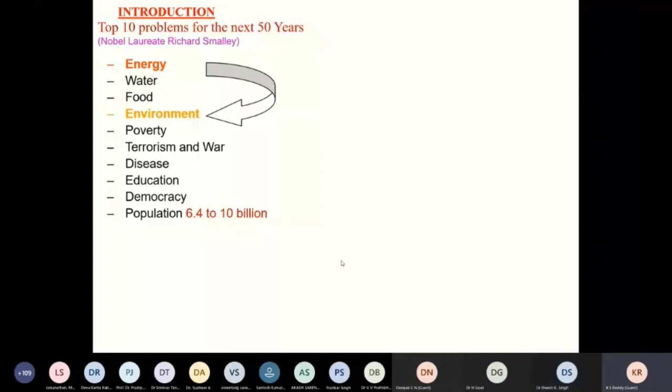So now, if you look at the future, the first three important things are energy, water, and food. Clean energy is an important aspect. Food is a major concern because population is growing rapidly, exponential growth in population. So the required food needs to be produced in the most effective way, and the agriculture sector needs to be strengthened.

Apart from that, water is another important thing. Most of the water bodies in India are polluted, and even across the world. So potable water is important now. If at all there is unrest across the world, it could be for these three: food, water, and clean energy. But for human survival, there's another important requirement, the air.

Somehow we are getting air free of cost. We are not spending any money, whereas we need to spend a lot on clean energy, food, and water. Though air is free of cost, it's not clean air. Because of energy consumption, human activities, industrial development, and increase in population, the environment is not conducive for survival. So there's a lot of potential to develop technology which makes the environment sustainable, cleaner, or green. Therefore, energy can solve some of the problems.

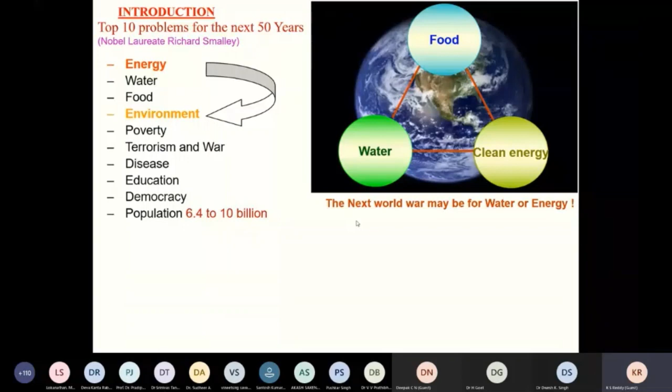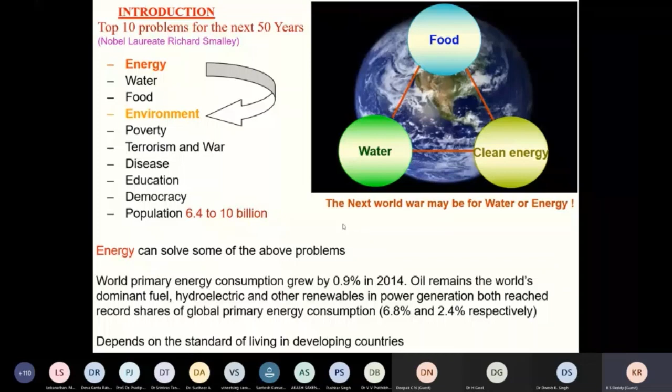Energy consumption is also rapidly growing day by day because of mainly three reasons: improvement in standard of living of people, massive industrialization, and population growing rapidly. These three reasons are mainly responsible for the increase in energy consumption.

And I have muted, sir. I have muted, you can continue. Okay.

Income energy includes solar and lunar energies, mainly non-depletable: electromagnetic, gravitational, particle energy from stars, planets, and the moon, and the potential energy of meteorites entering Earth's atmosphere, referred to as celestial energy, the energy that comes from outer space.

Capital energy is the energy that already exists on or in the Earth, generally in chemical and nuclear form, plus geothermal energy. So geothermal and atomic energy are referred to as capital energy.

If you look at reserves from the source, there are 4 reserves. The energy reserves on Earth can be grouped into 4 categories. First is renewable, which includes solar, wind, biomass, and ocean. The other is fossil fuels: coal, oil, gas, and nuclear, whether fission-based or fusion-based, depending on conditions. Generally, coal and fossil fuels are responsible for pollution, whereas nuclear and renewables are cleaner fuel sources.

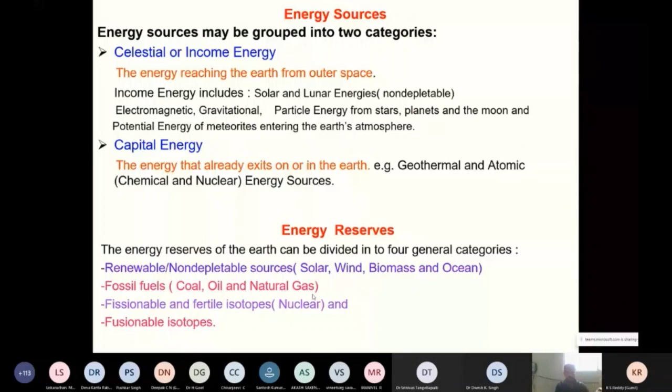If you look at the energy conversion system, which we call energy system hierarchy, it is transformed into equipment services. Energy sources include both fossil fuels, oil, gas, coal, and renewables, biomass, solar, wind, and nuclear. These are transformed into energy carriers, or secondary form of energy, subsequently used for various applications. These secondary forms of fuel or energy carriers include the most efficient form of energy, electricity, and liquid fuels.

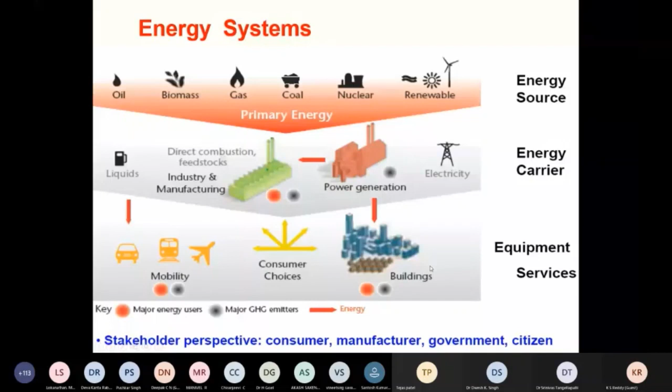If you look at the technological challenges, no single technology or policy can do it for all. There are different problems: region-based, source-based, market-based, preference-based, scale-up-based, technology-based, and time and infrastructure-based challenges. There are several challenges, whether for vehicle energy efficiency, biofuels or hydrogen fuel as part of mobility, or zero net emission buildings, since the building sector is also an important role as far as energy is concerned.

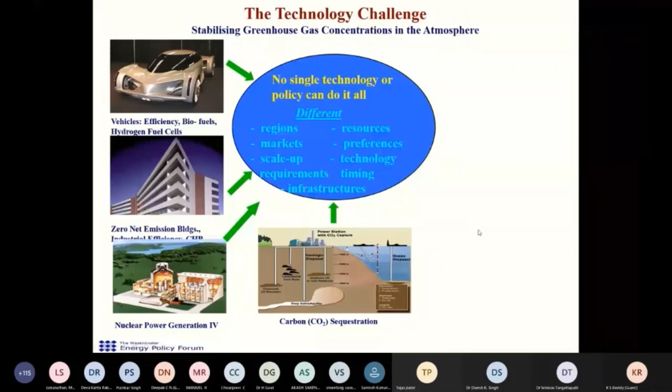Whether we go for industrial efficiency or CHP or any other thing, nuclear is another important aspect where 4th generation, 5th generation nuclear reactors are being developed. Pollution is a major problem, CO2 capture is a major issue, and CO2 sequestration is an important aspect. Advanced grids are important because transport, distribution and transmission is a major aspect for high quality energy like electricity, so advanced grids play a major role. Biofuels and power generation is another important aspect.

And of course, finally, the renewable energy technologies. So these are several challenges, and especially we are discussing the most important aspect, renewable energy technology, mainly solar thermal technologies.

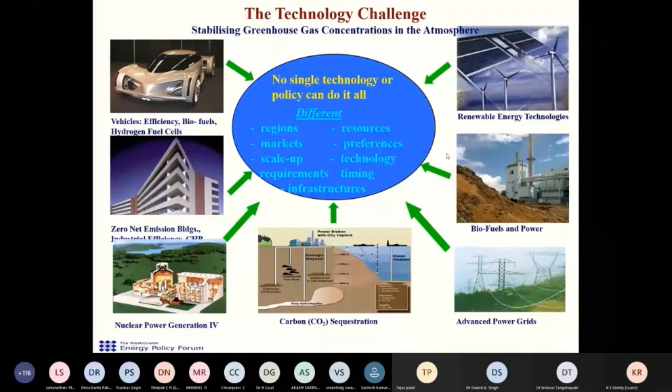It has a good potential and plenty of potential on the earth. If you look at the solar potential, it is about 23,000 terawatts, but the present world's energy consumption is only 16 terawatts. You can see how many times over we have solar energy potential.

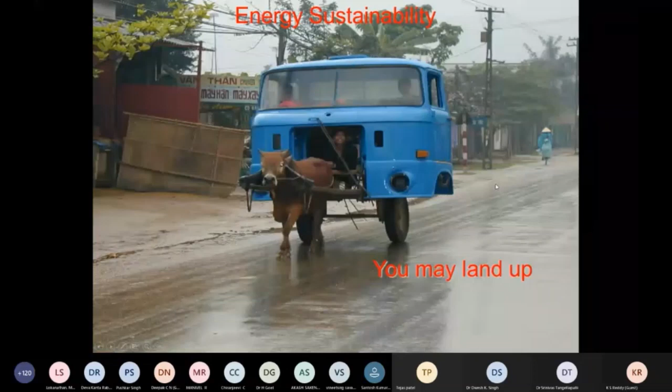Energy sustainability means - if you look at the Earth, it is bluish in color, but it's also surrounded by the atmosphere. As I mentioned, indiscriminate use of fossil fuel may result in imbalance of the atmosphere around it, because about 15 kilometers above the Earth is atmosphere, and that atmosphere is getting polluted. Because of fossil fuel utilization, it is literally being burnt and imbalanced.

Any imbalanced system is because the atmosphere is overloaded with pollutants, which results in imbalance. Any overloaded system looks like this. If you put too much pollutants into the atmosphere, you know that we are facing a lot of problems.

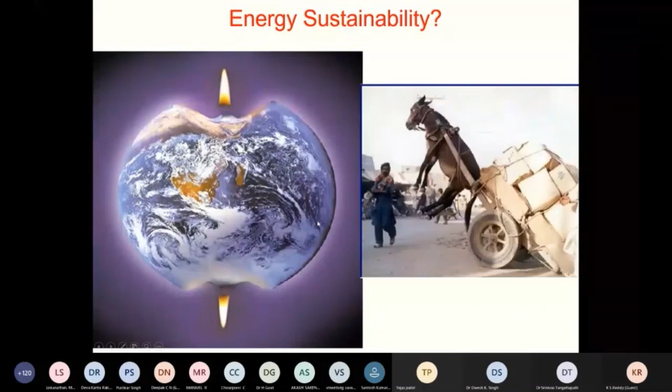So overloading the atmosphere with pollutants may be same as any overloaded system which you have seen on the right side. Therefore, energy sustainability is important because the resources need to be used most effectively.

Here you see these natural resources, including energy resources, and if you try to consume them like this without technology, they will become extinct after some time. Then this part will become empty, and future generations will not have any energy sources. So we have to keep the required resources for their use.

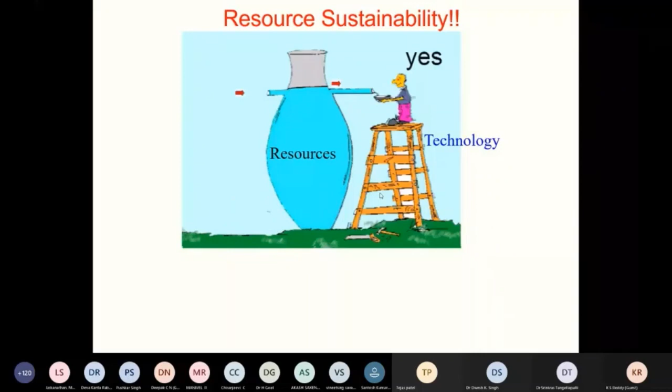It's important to develop an indigenous technology to keep resources for the future generation, and we can use our own share by developing this technology. That's why the future generation says there is only one Earth we have to take care of, please.

For energy resources, this technology is a renewable energy technology - not just a tool, but a renewable energy technology. You have to develop renewable energy technology in a more sustainable way to take our own share, keeping these reserves and resources for the future generation, while we take our own share.

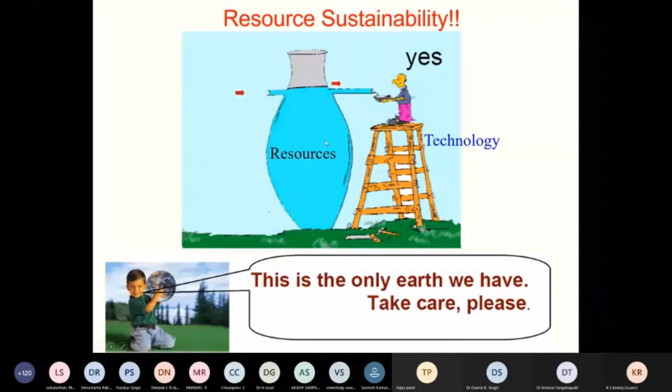If you look at energy reserves, which I have already mentioned earlier, the present annual energy consumption includes fossil fuels - coal, oil and gas with these big blocks - and uranium. With the present energy consumption rate, these reserves are finite.

They may become extinct after these many years respectively: natural gas in 63 years, oil in 46 years, and coal in 119 years.

Of course, uranium for nuclear is still unknown and not commercially used to a larger extent. But if you look at the top, there is abundant solar radiation available.

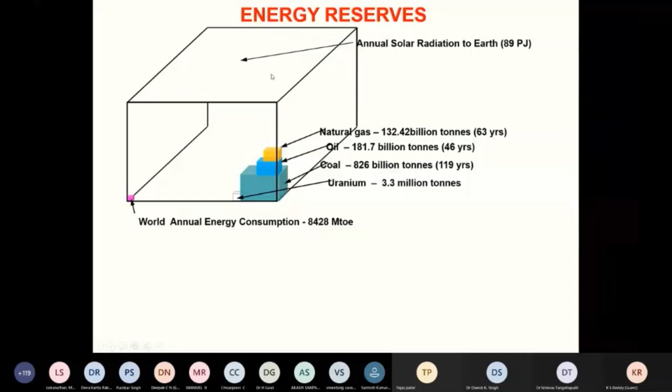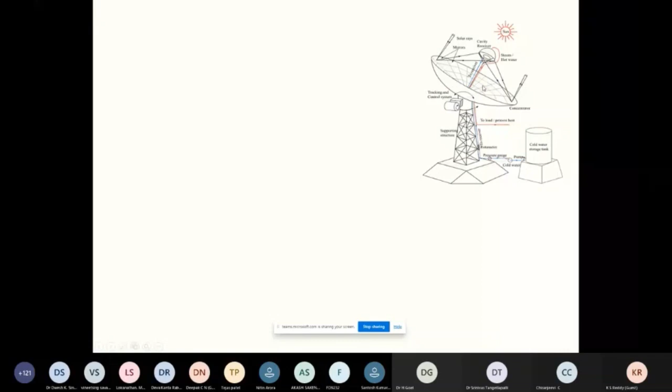There are three main components: concentrator, receiver, and support structure with tracking. This has to be tracked continuously. The development of a cavity receiver for high temperature and high pressure applications is a challenge, but there are a lot of opportunities in this.

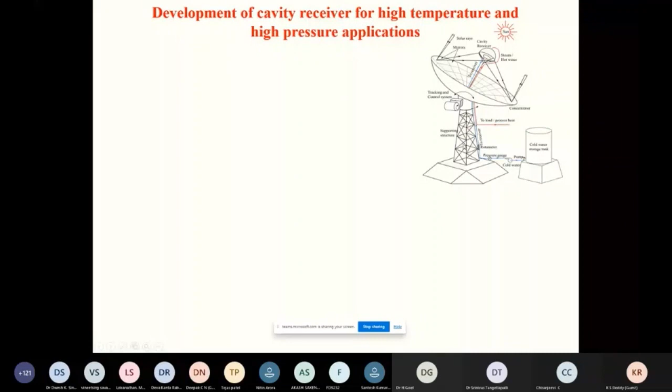All CSP technologies, like the parabolic collector technology, are most efficient with high concentration ratio and high operating temperatures. Here you see the tracking mechanism, the receiver and mirrors, and of course storage tanks are there.

The receiver plays a major role in solar thermal energy conversion and estimation of heat losses. The performance study is very important, and various researchers consider isothermal receivers, cavity receivers, adiabatic receivers, and so on.

But we have developed a technology which takes care of superheated temperatures up to 500 degrees Celsius and reasonably high pressures.

Applications for steam generation include superheating steam for multi-megawatt power plants, while saturated steam is for food industry, textile industries, and cooking applications. A subcooled system is for air conditioning and paper and pulp industries.

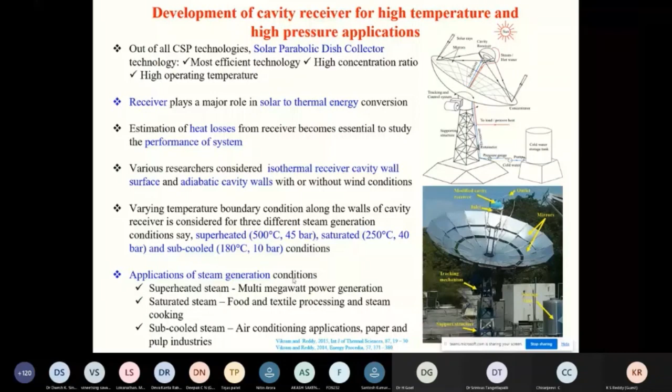But we have to discuss this receiver. Development of the receiver is very important, and this receiver has been studied under three different conditions, mainly from a heat loss point of view. These heat losses have been estimated with different techniques and so on.

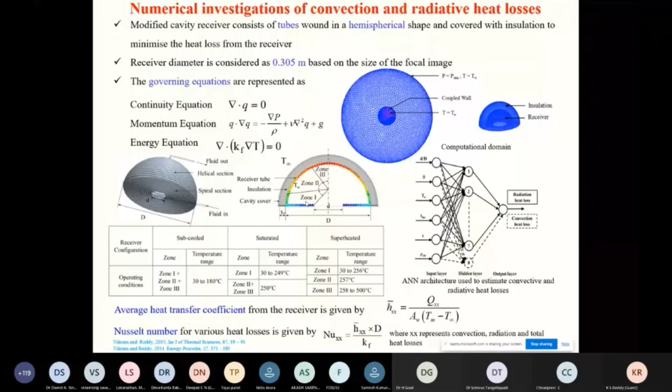We can even use artificial neural networks to find out the different receivers - mainly cavity, semi-cavity, and modified cavity - and how they are oriented in different directions, and how the heat losses occur from the cavity.

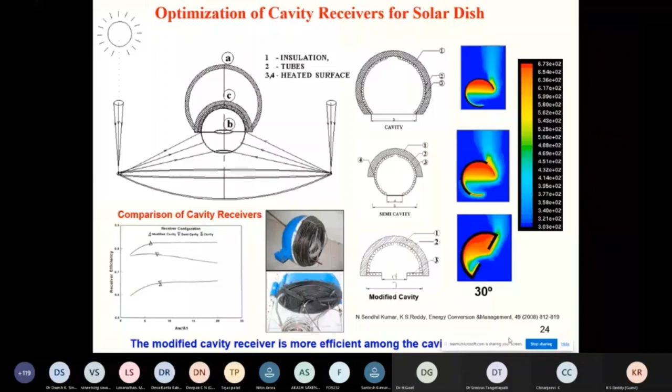This has been done with a numerical method by CFD analysis, and it was found that the modified cavity receiver appears to be more efficient in this case. So there are a lot of challenges, and design and development of the fuzzy focal dish is also very important.

We have different dish technologies: sharp dish and fuzzy dish. A sharp dish is very accurate, but if you go for inaccuracy, it gives a fuzzy focal dish, and because of the fuzzy focal nature, imperfect optics are involved.

That results in a wider range of focal image, which needs to be captured by the cavity receiver. Estimating heat losses for these cavity receivers is very important, and these losses depend on geometry, orientation, temperature, wind speed, and direction. So we developed a comprehensive model to estimate heat losses across different orientations, temperature ranges, and wind speeds, and this is the Nusselt number correlation for convection.

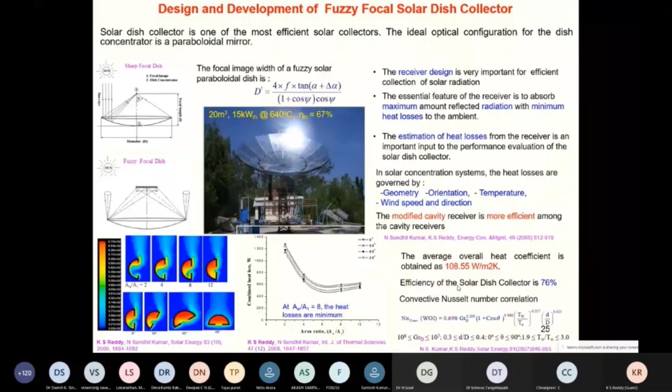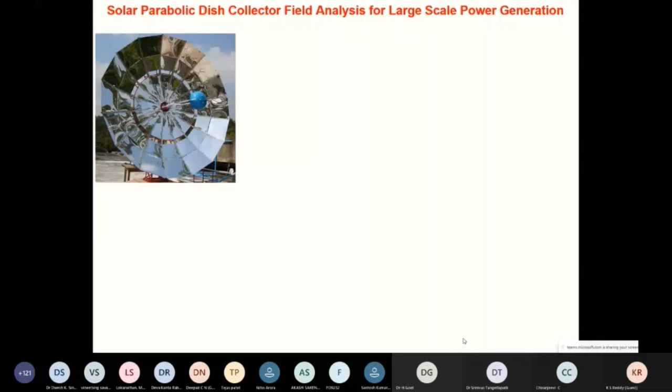If we have this parabolic dish, we have to analyze a problem - not only a single collector, but multiple collectors as a field.

As I mentioned, different correlations have been developed for different conditions, mainly covering both convection and radiation. These are extensive heat transfer analyses, and the total Nusselt number correlation for different temperatures, the D by D ratio, insulation thickness, and other parameters have been studied here.

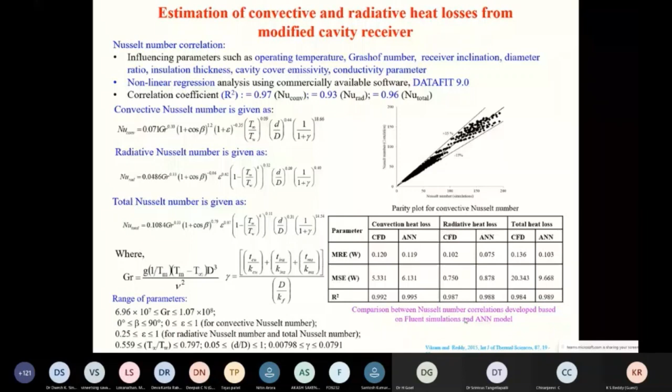We have also used artificial neural networks to come up with these heat transfer coefficients, and they seem to perform better compared to CFD analysis, because CFD requires a lot of space, code, and other resources. So we can use statistical methods to find out how effective this is.

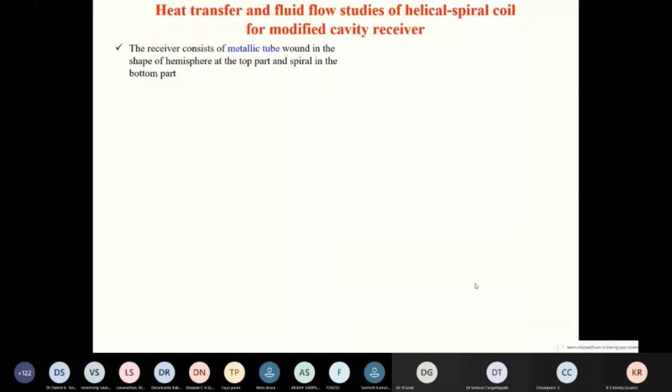Heat transfer and fluid flow studies: here is heat transfer, fluid flow, and the helical-spiral modified cavity. You can find out temperature and all these parameters.

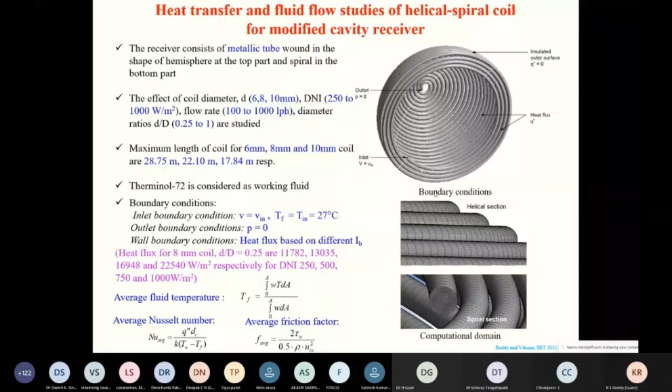There are a lot of challenges here - grid generation, boundary conditions, and so on. We have come up with the average Nusselt number for different sizes of this and different boundary conditions.

Looking at heat transfer and fluid flow studies in the helical coil for the modified receiver, there's an entry showing how the flow distribution in the tubes for different sections has been studied - this is liquid, liquid to heated fluid, superheated, and so on, depending on how it goes through and comes back out.

Here you see the cross section of the cavity receiver, and how the fluid transforms into different phases and so on, as shown here.

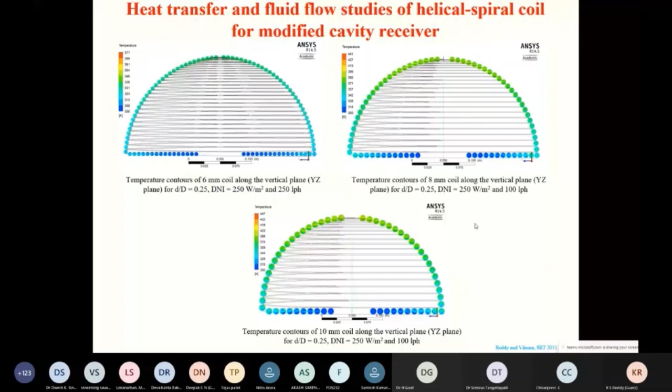There are several issues and challenges here - the receiver, absorbing coating, vacuum evacuation, glass to envelope, glass to metal seal, absorber stability, and all this. These are the major challenges in the development of parabolic trough.

There are receivers which can handle the two-phase condition, using thermic fluid or water, anything. We have done comprehensive heat transfer analysis for this, studying how we generate superheated steam and so on.

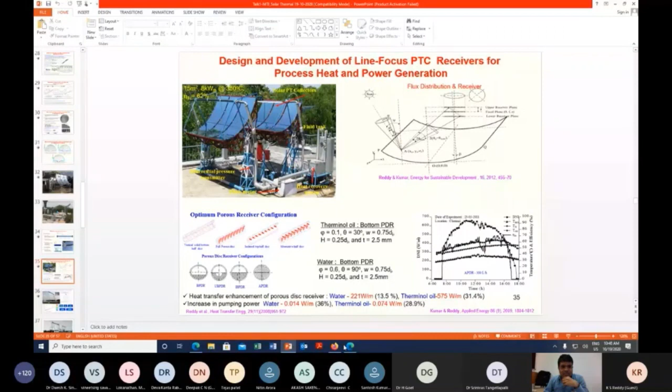Sir, how much cost will it be for implementing this parabolic shaped antenna? For implementation of such a parabolic shape antenna, how much cost will come in capex cost?

Capex cost depends on the size, but generally based on the surface area, it's about 10 to 15,000 rupees per square meter. Based on kilowatts, per kilowatt it will be somewhere about 1.5 to 2 lakhs rupees. Okay, thank you sir.

Professor Srinivas, may I ask you something sir? Please go ahead. Myself, Professor Goel, working as a chemistry professor at State Engineering College, Uttaranchal. As a man of chemistry, I am asking you, you are using parabolic reflectors. What chemical are you using as a fluid to transfer the energy? What fluid, chemical?

See, these fluids can be different fluids. They can be anything, but generally for heat transfer, the basic character of the fluid is it has to be cheaper.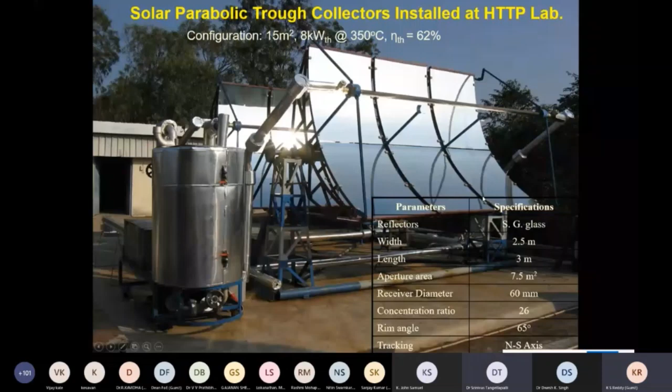This is a linear parabolic trough collector where it's made parabolic, but on the other side is a line. In the previous case it was three-dimensional; this is two-dimensional parabolic, and all the reflected rays come onto this receiver where it's heated up. Working fluid is sent on one side, and steam is obtained on the other side. Based on that, we have come up with different generations of parabolic dishes and troughs.

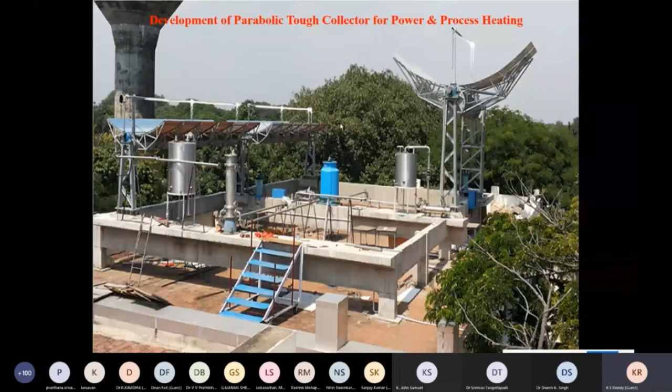This is a power plant installed in our lab for process heat and power generation. There are several challenges we discussed, mainly regarding the receiver, absorber, vacuum and evacuation, glass-to-metal seals, absorbability, and stability.

All these are major challenges, but some we have to fix. Therefore, there's a lot of potential for opportunities also in developing these.

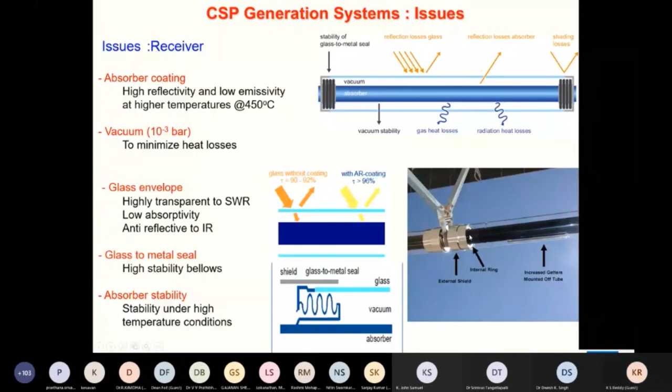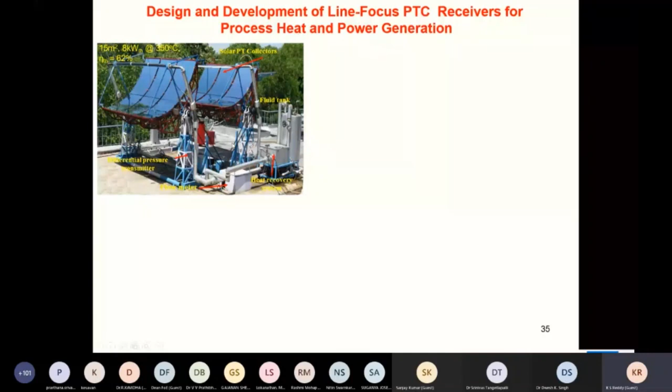One is the design and development of a line-focus PTC receiver for process heat and power generation applications. You can see two parabolic trough collectors connected in series, and we need to do optical analysis because, as I mentioned, there are three important components: the mirror parabolic concentrator, the receiver (whether line focus or cavity receiver), and the support structure, because a huge support structure is required, along with a tracking system since we have to track continuously.

Moreover, these systems are kept in outdoor environments, open conditions, so they have to withstand wind loads, extreme dust, and other conditions. This is a two-phase system, so the receiver is also very important, and optical analysis is crucial.

Based on this, we have come up with an optical analysis and found different heat transfer coefficients as well as heat transfer rates for different working fluids, and then we evaluate the performance under different conditions.

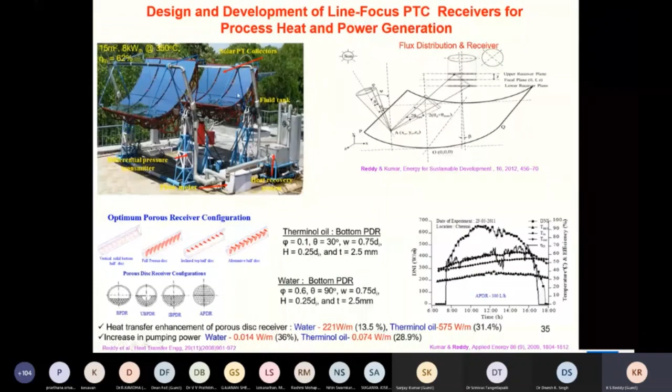Hello? Sir, continue. Yeah, okay sir.

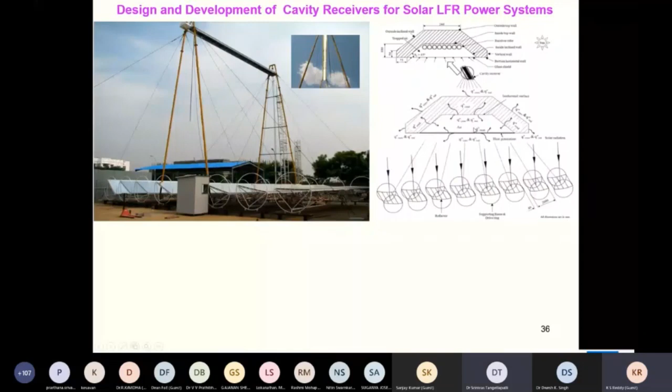This will have several heat losses involved, whether conduction, convection, and so on. That is the problem, and we can find out the heat losses in these receivers and determine the different aperture angles, aspect ratios, and so on.

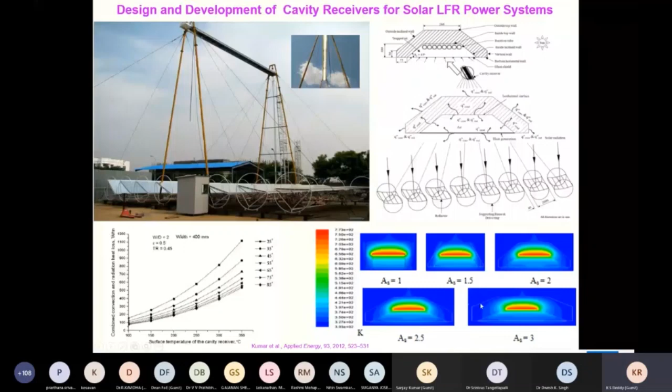This one can produce cogeneration, and I think Dr. Srinivas is going to cover the polygeneration aspect. So we have explored cogeneration and trigeneration aspects here. Cogeneration means both heat and power, and polygeneration means heat, power, water, and air conditioning.

In fact, we produce water and use it for process heat in the kitchen, as well as, since this is a school, for air conditioning aspects.

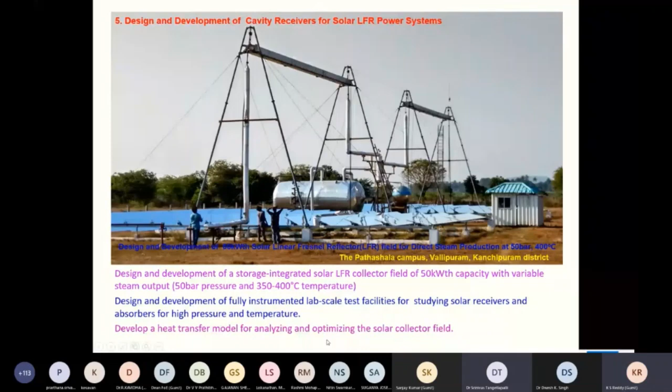You can see the receiver, how it looks, and how a lot of optical, thermodynamic, and heat transfer studies have been carried out; these are available in open literature. You can look at some of my papers if you are really interested in this.

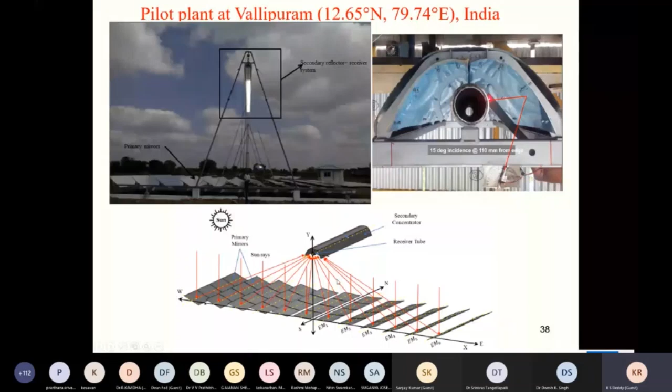Again, we have to do heat transfer analysis with computational three-dimensional heat transfer. This is the computational domain, and there are a lot of challenges here, such as how to get the flux distribution and so on.

So we have to consider it lengthwise, because the wind flows from one end to the other. There are different types of wind conditions, whether the wind comes onto the receiver or away from it, or from the side, bottom, top, or anywhere else.

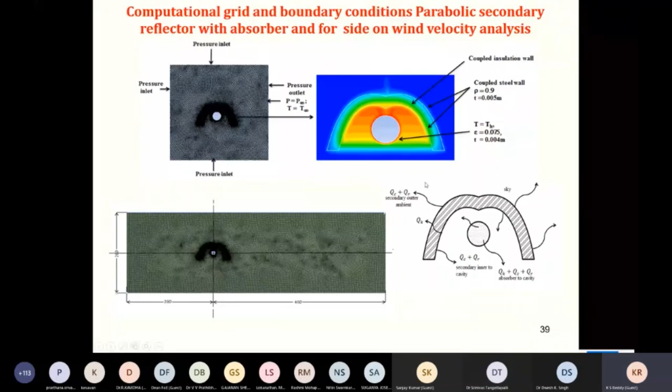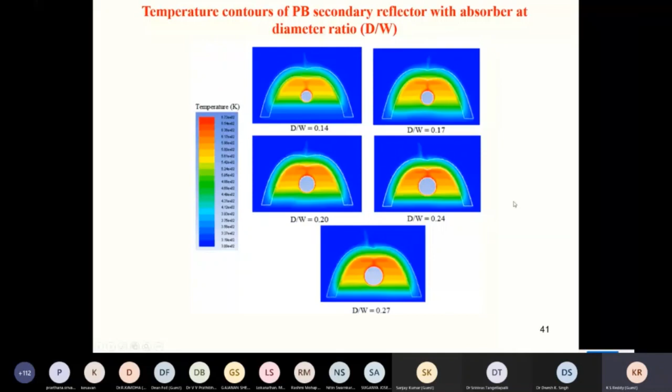We call it head-on wind, side-on wind, and back-on wind. These are winds that need to be considered, and we have to find out how the stratification of temperature within the cavity receiver needs to be estimated in order to design the receivers. These are some aspects of the receivers, where the diameter of the tube to the width of the aperture is important, because if you go higher, there will be higher losses, and if you have lower d by w, you will have other aperture problems. So we fixed d by w at about 0.17, and wind effects have been considered.

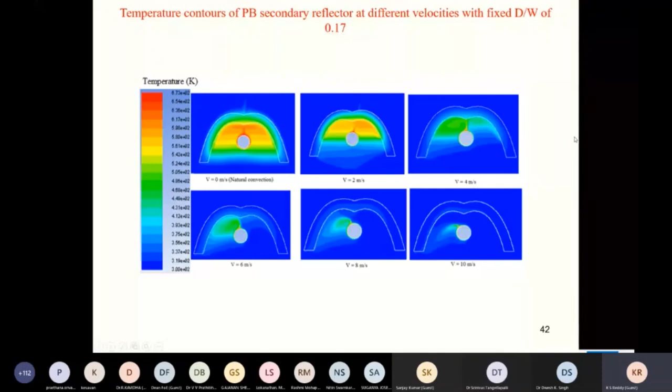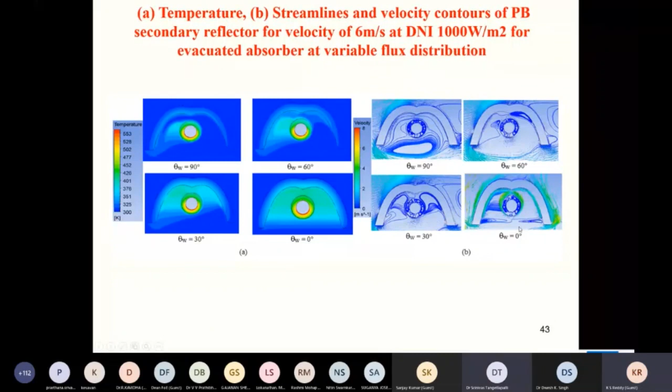If wind is flowing in this direction, see how the flux distribution changes. Initially with no wind, it looks like this. At 2 meters wind, there is some disturbance. At 4 meters it looks like this, but it comes from this direction. At 10 meters, most of the heat is taken away by the wind. You can see the temperature distribution and streamlines for different theta angles.

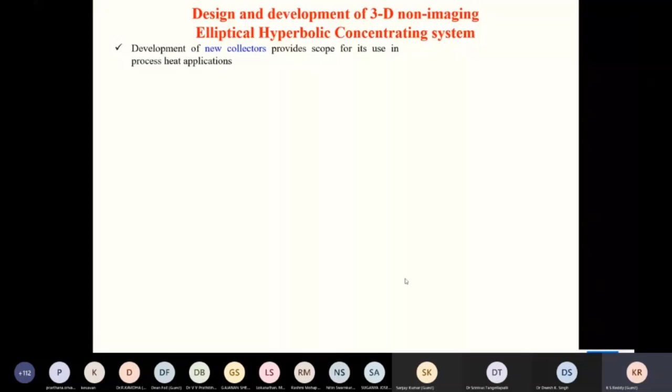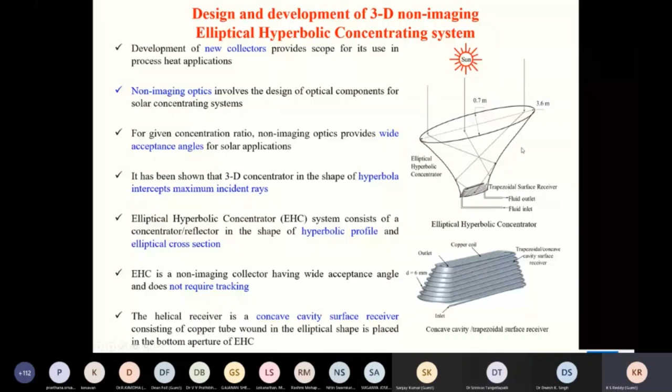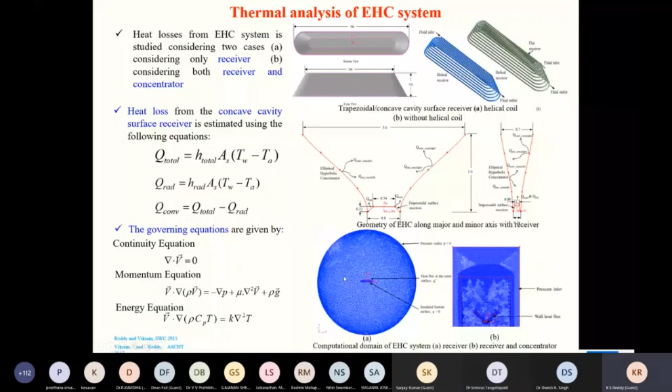We need to study heat transfer from this. Its front view is like this, side view is like this, and the receiver is placed at the bottom. This is a trapezoidal inverted trapezoidal shape, and for surface properties we find heat transfer from both, then take a computational domain for CFD analysis to see how the flow within the concentrator as well as the receiver, the fluid flow, and heat loss occur.

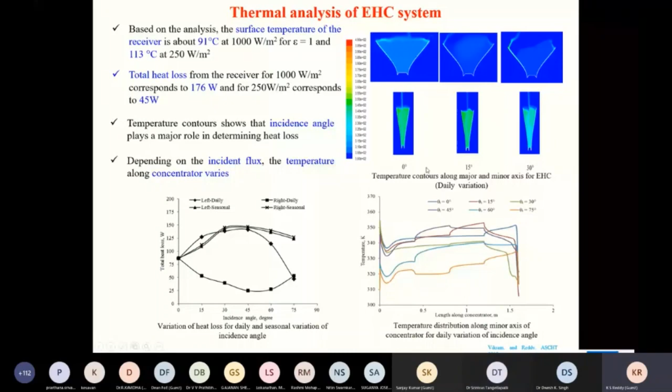Depending upon the emissivity and other factors, with different incident angles, the total heat losses have been estimated. There is also temperature variation along the length of the concentrator. These are different studies for different theta angles.

If you look at it experimentally, it looks like this. We have developed two elliptical concentrators, and this is the receiver. You can see the helical receiver placed at the bottom, and they are faced and coupled here, and these are some of the characteristics.

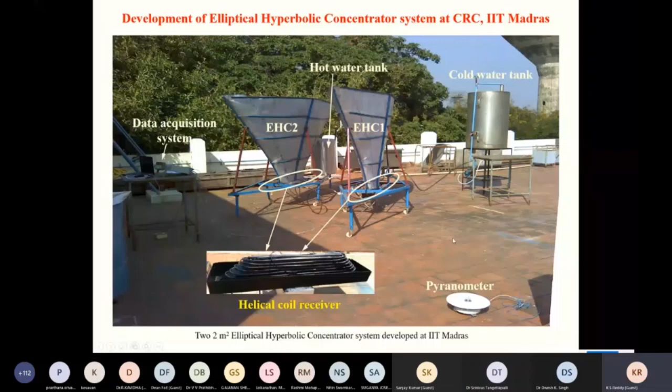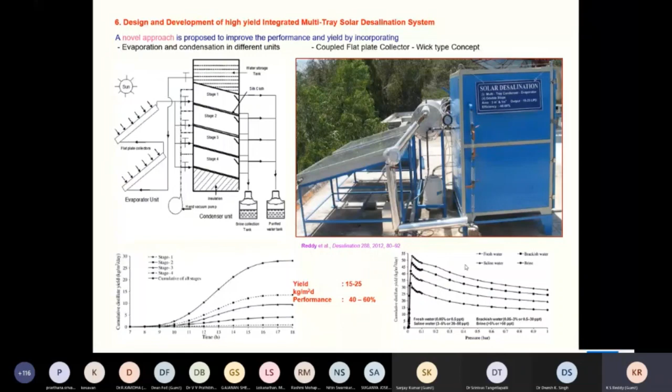It can handle this. We have estimated yield at different stages like this, using different feedstocks such as saline water, brackish water, fresh water, and brine. This system can be used not only for generating potable water but also for treatment of wastewater.

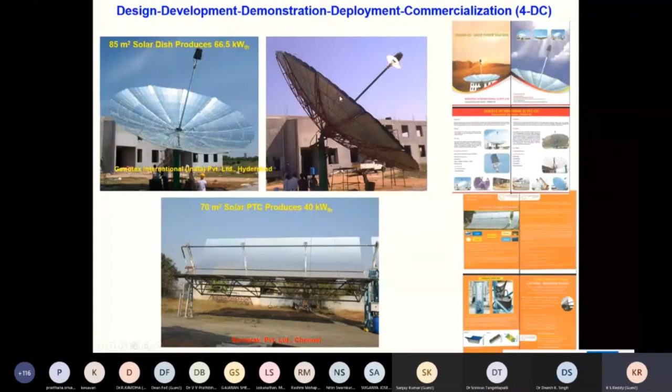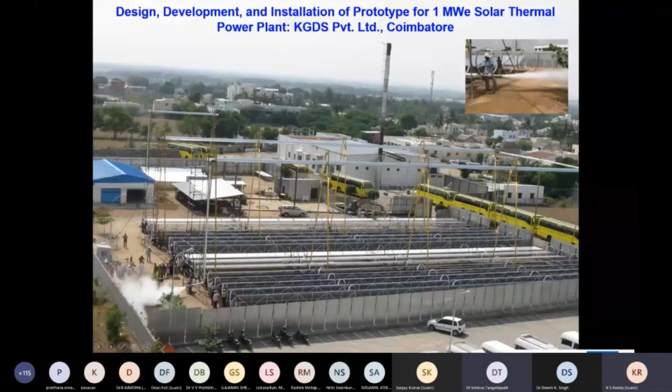And these are our dishes. I think I told you we have developed a 6th generation dish. This is the 3rd generation dish. What was shown earlier is the 2nd generation, and this is a parabolic trough. You can see the linear Fresnel reflector, how steam is produced from such a massive reflector, and this steam is expanded in a turbine. One of our industrial associates has taken this forward and installed large-scale concentrating solar power plants.

As I mentioned, the desalination system can be used not only for seawater, but also wastewater. Many industries pollute water, and that pollutant can be treated. The pollutants have to be treated before being rejected into the atmosphere. So we have considered a typical textile effluent plant, where a lot of effluents are rejected into the atmosphere and agricultural land. How can solar energy be used to treat that?

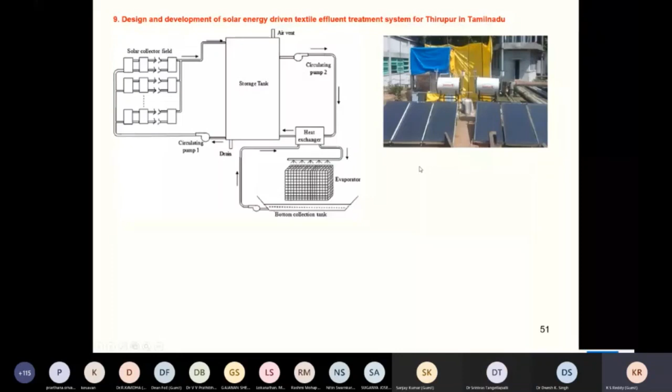This is in Thirupur in Tamil Nadu. We have installed one such system, and it has shown better potential. The Tamil Nadu Planning Commission wanted to install it in different industries, because treatment is a major challenge, since the cost of textile production is going up substantially and they become uncompetitive in the international market due to competition from Bangladeshi textiles.

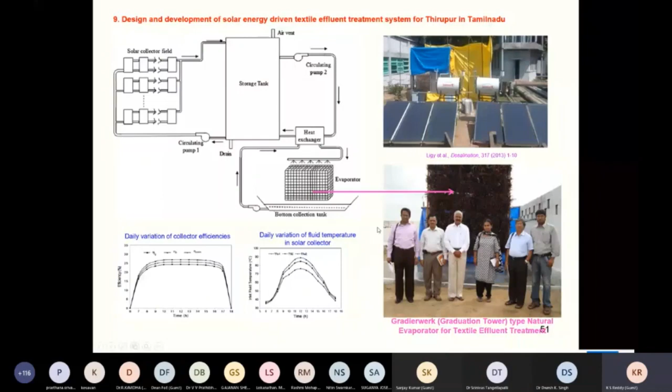We have transferred the technology to a Mumbai-based company. They are planning to implement it, and have already installed one or two, but they may implement it elsewhere also.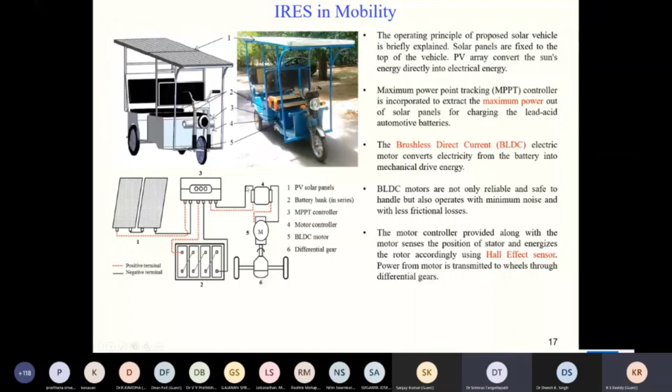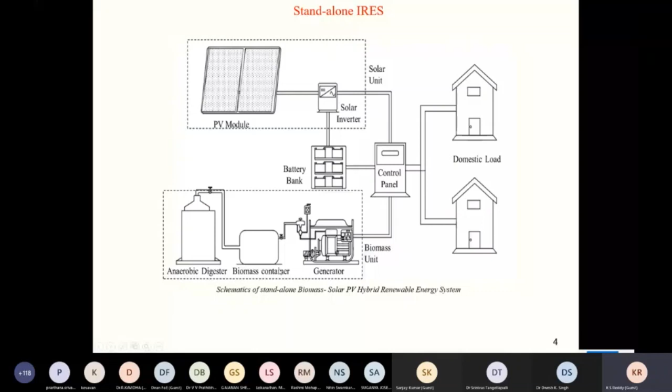Another thing is the integrated renewable energy system, called standalone Integrated Renewable energy System, or IRES. You can combine not only solar energy, but also biomass with a biogas digester. This is a system we installed in Shantiniketan, which is Vishwabharati University, Rabindranath Tagore's place in West Bengal. This is working and supplies power to a tribal village behind it 24 hours a day, using biomass as well as solar. You can see solar panels on top, and inside it looks like this.

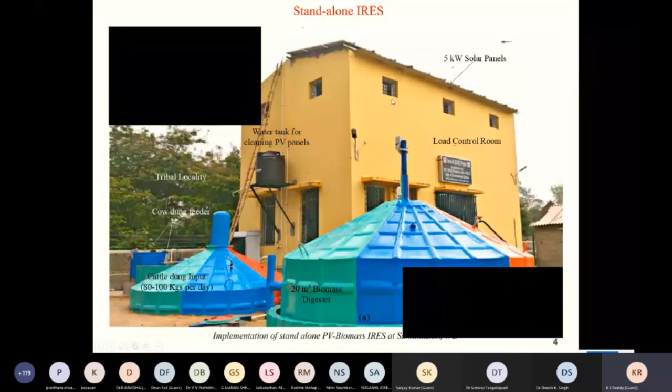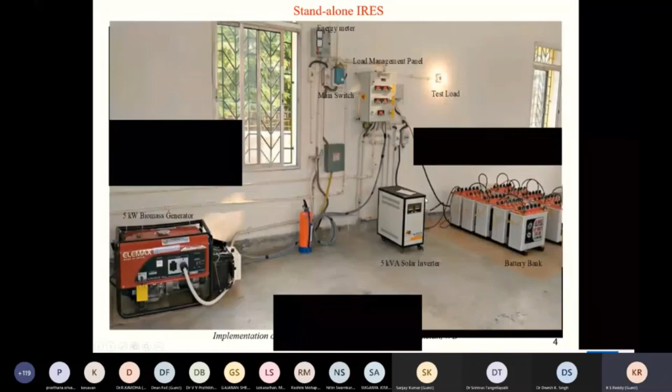The biogas is fed to the biogas generator, which produces electricity. Electricity is connected here with some battery storage, and the solar panels also produce electricity which is stored, and the combined integrated energy is supplied to the village. If a grid is present in some locations, we can also connect to it - we have developed a control system for grid connection.

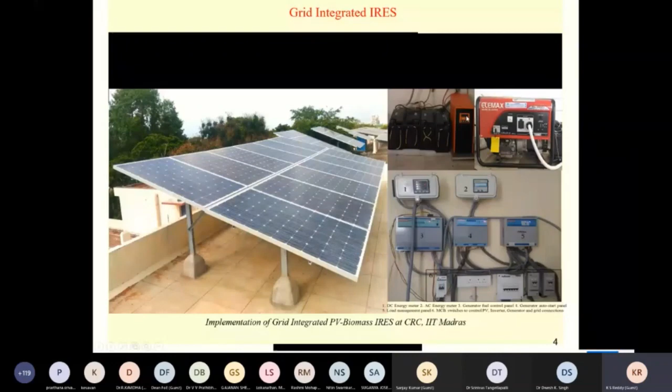The auto I showed has also been compared with conventional autos, and it proved to be better from an economics point of view and environmental point of view, with a reasonably good payback period and lower emissions.

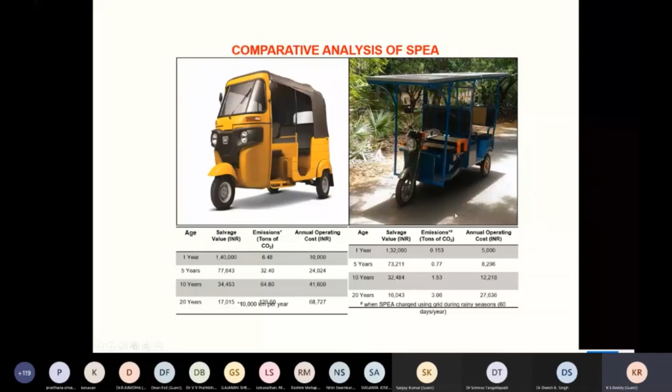So with this, you have seen several solar thermal energy conversion technologies and associated solar energy technologies developed at IIT Madras. With this, I'll close the first talk, based on challenges and opportunities in solar energy conversion, where optimization of the energy system for sustainable development is done using analytical, numerical, and statistical tools - mainly neural networks for statistical, CFD for numerical, and first law analysis for analytical.

Optimization of concentrating collector systems is very important for prediction of heat transfer characteristics, design of an efficient receiver, and viable solar energy systems for process heat, since there is a lot of potential in textile industries, dairy industries, tanneries, and water production. Our approach is a 4DC approach: design, development, demonstration, deployment through commercialization, because some of our technologies have been taken to market by our industrial associates and commercialized.

In the background is my third generation dish, and a fourth generation dish. There's also a fifth generation dish from another company. I'm unable to show some of these because a lot of IPs are involved and we have filed patents on them, so we cannot share some of those with the public - that's why I have not shown the next generation dishes here.

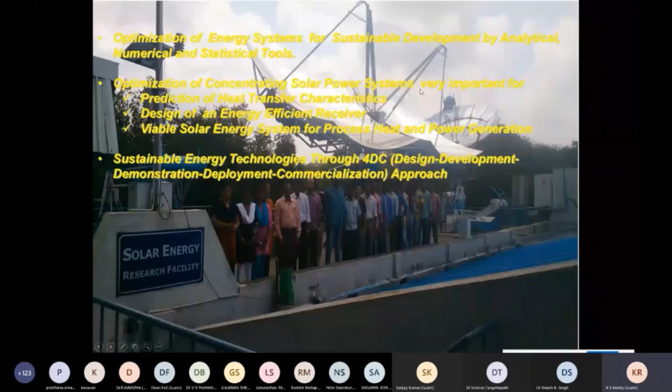Thank you, sir, for giving light on challenges and opportunities in solar thermal energy. You shared the computational results and experimental results with case studies, and also thanks for sharing some innovative designs in the shape of elliptical and hyperbolic shapes. Now I request the participants if any questions on this topic, challenges and opportunities of solar thermal energy.

Dear participants. Hello sir, good afternoon sir. Good afternoon. Sir, how the concentrated photovoltaic is different from photovoltaic?

So you know that photovoltaic panel, photovoltaic - the photovoltaic panel, what is the efficiency of that? Do you have any idea? The efficiency is very less, about 10 to 20% maximum.